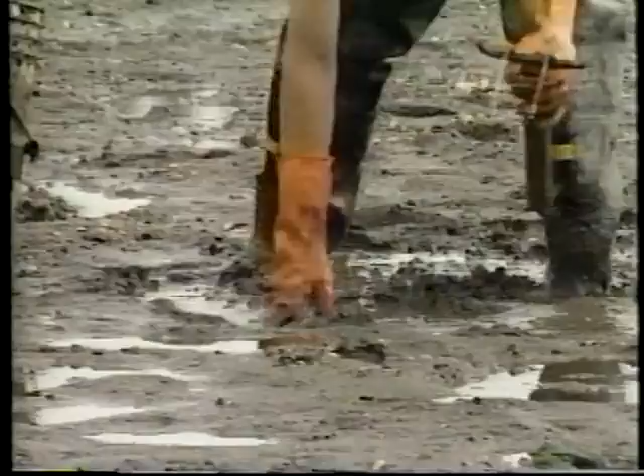As the child looks closely into the pool of water, water's true gift is revealed to him. Life. Water is life. Water feeds the shellfish and agricultural industries, which in turn feed us and feeds our economy with thousands of jobs. Clean water. The water we drink, the water that provides us with a quality of life that's enviable.

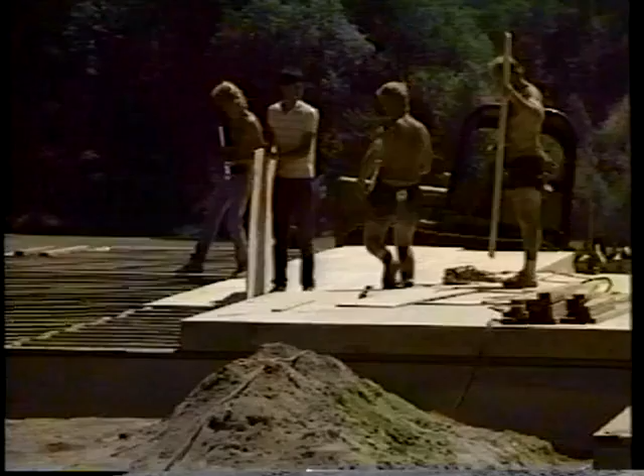But as the population increases, so does the threat to our life-giving waters. In recent years, untreated and inadequately treated sewage from failing septic systems has contributed to the contamination of our water resources. Our rivers, lakes, and groundwater serving our wells are being contaminated, and the health of our neighbors, friends, and families is being threatened.

Hi, my name is Randy Hoffmeyer. Water quality is a complex issue. As a homeowner, you play an important role in helping to keep our area's water clean and pure. In fact, you own a tool that's designed to help keep our area's water clean. An on-site sewage treatment and disposal system. Your septic system. A septic system treats wastewater to a level that can be safely disposed of. When properly maintained, an on-site sewage system provides not only effective treatment and disposal of household wastes, but it can last indefinitely.

In this program, we're going to take a look at what a sand filter system is and how it works. In the second half of the show, you'll learn about inspecting your system and how to maintain it so you can avoid costly problems. A properly maintained system is going to effectively treat your sewage and save you a lot of money and headaches. But before you learn how to maintain your system, you first have to understand why you have the type of system you do and how it works. With growing concerns about the degradation of groundwater and surface waters, alternative systems have become increasingly common because of the increased efficiency in treating and disposing of sewage.

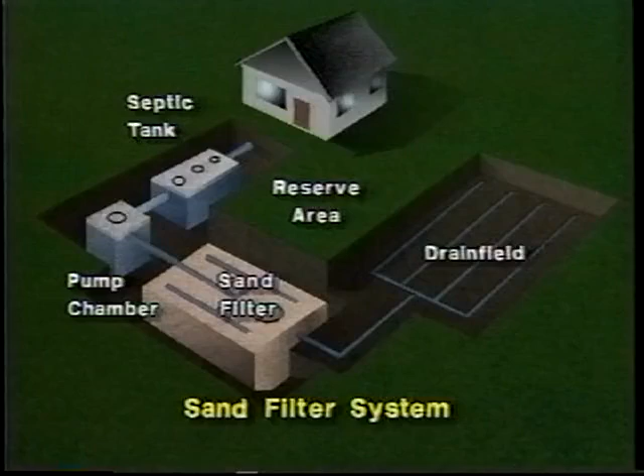The septic tank is a watertight tank, usually constructed out of concrete. In the state of Washington, a two-compartment septic tank is required for all new on-site sewage system installations. Here's how it works. Household wastewater flows from the house into the first compartment through an inlet tee. In this compartment, household wastes separate into three layers. Heavy solids settle to the bottom of the tank to form a sludge layer. The lighter solids, like fat, grease, and paper, float up to the top, forming the scum layer. This separation process yields a treatable liquid wastewater layer called effluent in the center of the compartment. The wastewater flows out of the first compartment through the outlet tee into the second compartment. Here, the separation process is repeated.

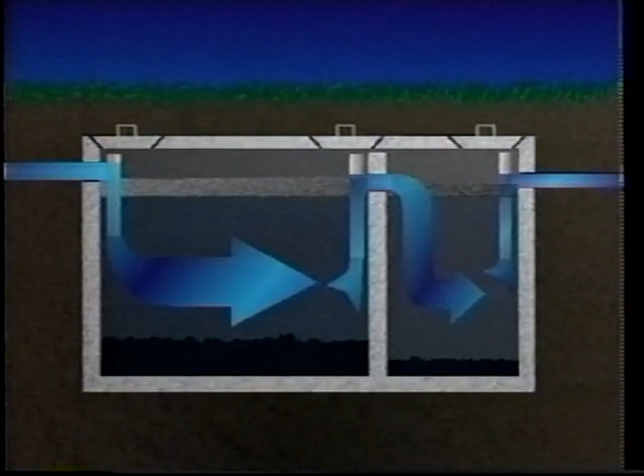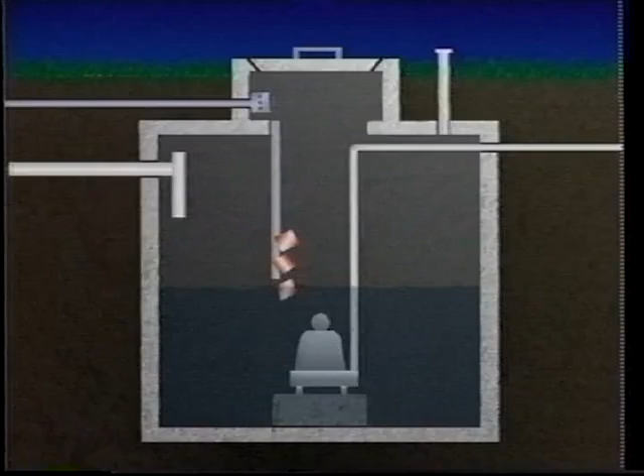From here, the partially treated wastewater flows out of the septic tank through a screening device and into the pump chamber. In the pump chamber is a pump, on and off floats, and a high water alarm float. When the effluent rises to the level of the on float, the pump begins gently forcing the wastewater under pressure to the sand filter. The pump lowers the level of effluent in the pump chamber until it reaches the level of the off float and stops. The effluent is distributed evenly over the surface of the sand filter through a network of small pipes, trickles through the gravel, and is treated as it filters through the sand. A gravel underdrain collects and moves the treated effluent, either by gravity flow or pressure distribution, to the drain field, or a mound system, where it is dispersed into the soil.

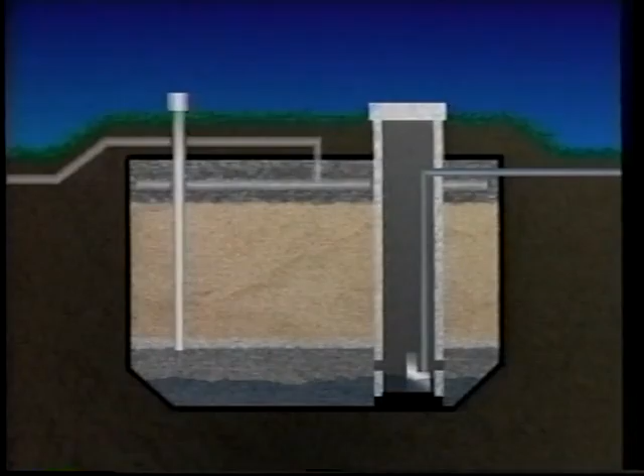To get a better understanding of where and why a sand filter system is installed, we're going to talk with Kevin Plemmel, a sanitarian who has reviewed many alternative systems. Now, Kevin, when you're evaluating a potential building site such as this, what are some of the things you're looking for? Well, Randy, when a designer or engineer evaluates a site, he takes into consideration such factors as setbacks to surface waters, setbacks to wells, topography limitations, and most importantly, soil conditions. Now, what are you looking for in the soil conditions? What we're trying to achieve here is a certain level of treatment before the sewage re-enters the groundwater. And if the soil type and soil depth are inadequate to provide this, an alternative system will be required. To get a better understanding of how a sand filter system works, we're going to talk with Mike Olson of Olson Backhoe, whose crew is in the process of installing a sand filter system right now.

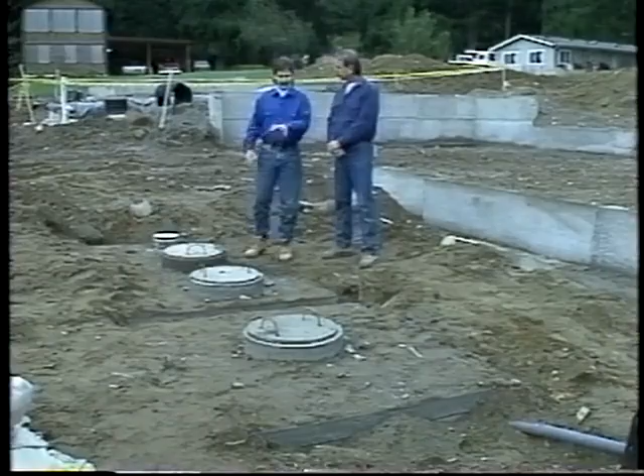And during the installation process, Mike worked closely with the engineer who designed the system to ensure that it would be built to exact specifications. Well, Mike, I see that your crew has already installed the septic tank and the pump chamber. Why don't you lead us through what happens to the wastewater once it leaves the house?

Sure, I'd be glad to, Randy. Basically, we have all the raw sewage after it leaves the house. It enters the tank at this location here, goes through a settling process, then there's a divider in the tank, then secondary settling takes place in this area of the tank. So there are two chambers here. That's correct. Then from here on into the pump chamber. And once it reaches a certain level there, then the pump will kick in and send it onto the sand filter. That's correct. Now, why don't we go take a look at the sand filter? Sure.

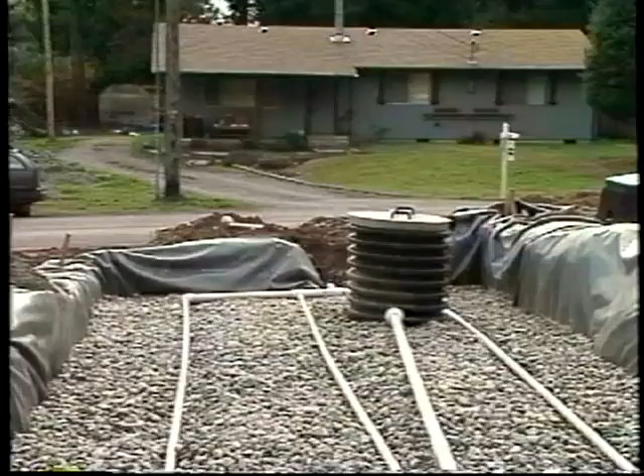Okay, Randy, what we have here is the sand filter itself. Now, this one is in a stage just prior to being covered up. As you can see, the pipe entering from the pump chamber here is then pumped out through these three laterals for even distribution throughout the length. The effluent then filters down through the drain rock and through the sand treatment medium beneath it, is then collected into this dry well and is pumped into either the mound or the drain field.

Now, every system is required to have a reserve drain field area in case the main drain field area should fail. And it's also important to treat that reserve drain field the same way you would the main drain field, right? That's a very good point, Randy. You want to make sure that you don't drive or build on the drain field or the reserve area. Where is the reserve area for this system? For this system, it's right below us in this area. Now let's take a closer look at a drain field.

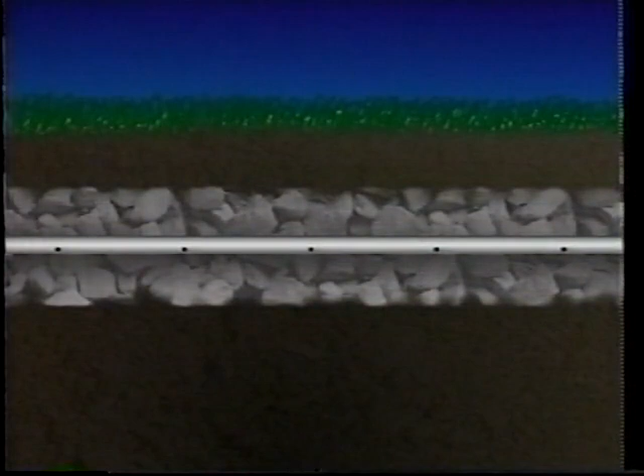The drain field is composed of a network of perforated pipes placed in gravel-filled trenches in the soil. Effluent is pumped through the pipes in controlled doses to ensure uniform distribution throughout the drain field. The effluent leaves the pipes under low pressure through small diameter holes and trickles downward through the gravel and is treated in the soil before it reaches the groundwater.

Now that you know how your septic system works, it's important to know how to keep it functioning properly. At the beginning of the show, I said that a home septic system was a highly effective, long-term wastewater treatment and disposal system. The key to long-term effectiveness is simple routine maintenance, regular inspections, pumping when needed, and prudent use of your system.

The owners of this house know they have a septic system and think it might need to be pumped. To find the design and location of their system so they can show the pumper, they check their as-built plans that they got from the local health department. Larry Kosher of Petunia Pumps is going to inspect the system to determine what condition it's in and to see if it's functioning properly. Well, Larry, I see that the homeowner has uncovered the manholes and the system's ready for inspection. Now, what are you going to be checking?

When I come into a system like this, I always check the inlet and outlet baffles first to make sure that they are clean. If not, we clean those up really well. Then I go to the main chamber and I check the scum and the sludge layers to make sure the tank needs to be pumped. Now, is this inspection something that a homeowner can do themselves? Yes, it is, but they need to contact their local health officials first. Okay. While Larry checks the system, we're going to take a closer look to see what he'll be inspecting.

Inside the septic tank, the sludge settles out at the bottom, the scum layer floats to the top, and in the middle is the effluent that will be pumped into your drain field for further treatment. If the distance between the top of the sludge layer and the bottom of the tee is 12 inches or less, your tank will need to be pumped. If the sludge level were to reach the bottom of the outflow tee, your system would begin pumping sludge into the drain field, clogging the pipes and the soil. If this were to happen, you would need to replace your drain field, which is a very costly process.

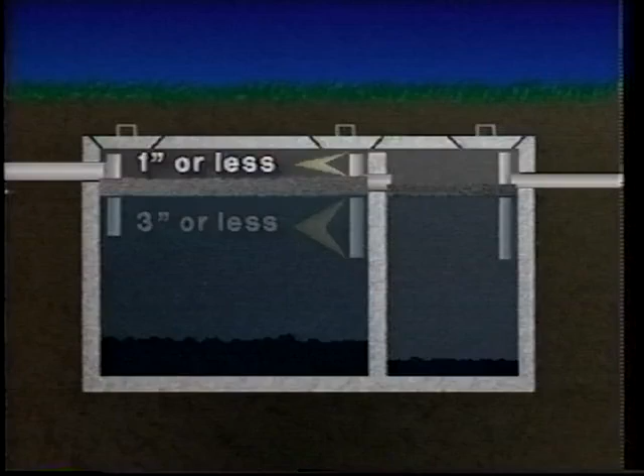Your tank will also need to be pumped if the distance between the bottom of the scum layer and the outflow tee is less than 3 inches and/or if the top of the scum layer is within 1 inch from the top of the outlet tee. Well, Larry, what did you find? Does the tank need to be pumped? Yes, it does. The scum layer is really heavy, and I'm afraid if they would have waited any longer, they might have had some severe problems. What's the rule of thumb on how often a tank should be pumped?

Usually we recommend every 3 to 5 years, depending on how many people are on the system and how they use their system. The important thing to remember is to have your system inspected on a regular basis to make sure that it's functioning properly.

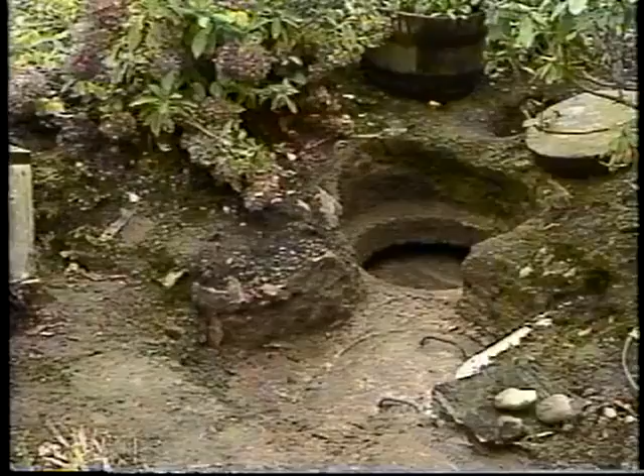Besides checking the tank, there's some regular maintenance that needs to be done to the pump and the pump chamber. Even in a system that is in perfect working order, some large particles may pass from the septic tank into the pump chamber. All systems using a pump for pressure distribution are required to use either a screened outlet baffle or a screen around the pump to prevent large particles from entering the drain field.

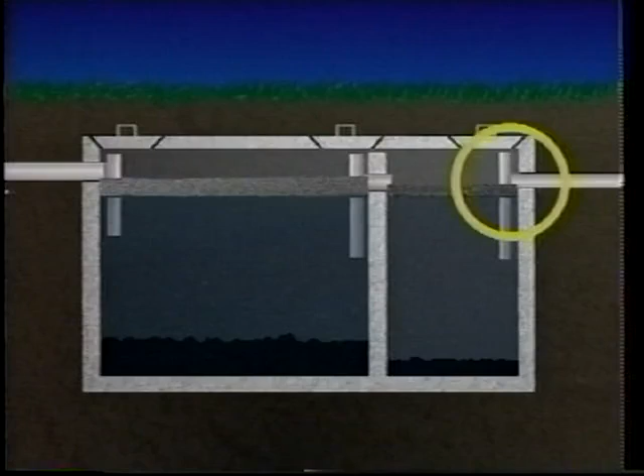The screen is also used as an early warning system. If the screen plugs, it is a good indication that your septic tank has exceeded its capacity and should be checked immediately before any damage is done to your drain field. You will also need to have any solid material that may have accumulated in the pump chamber pumped out.

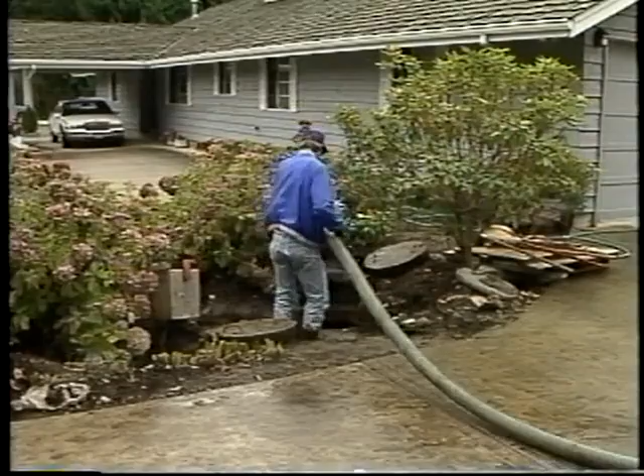Your pump chamber also has a high water alarm that will go off when your pump chamber becomes too full. These alarms can be located in a variety of locations, so if you don't know where yours is, check your operations manual. Inspecting your septic tank once a year, pumping when needed, and inspecting your pump chamber are important steps in ensuring a long life for your septic system. There are other steps, however, that are just as important, namely, protecting your system from damage and using it wisely.

Once you know where your septic tank, pump chamber, drain field, and reserve drain field area are located, it's important to protect them. Never drive heavy equipment like cars or trucks over your drain field. The weight can break the pipes and compact the soil, causing your system to fail.

When landscaping, make sure that what you plant is compatible with your drain field. Roots can damage pipes. Construction over your drain field, or even laying concrete or plastic, can cut off the supply of oxygen to the soil. This lack of oxygen greatly reduces the ability of the soil to properly treat wastewater. Grass is the best cover for your drain field.

Depending on your system, you may have one or more 4-inch capped PVC pipes like this one sticking up in your yard. This is a monitoring port. It's important that you do not remove it or allow it to be filled in. If you'd like more information on how to check your monitoring port, contact your local health department.

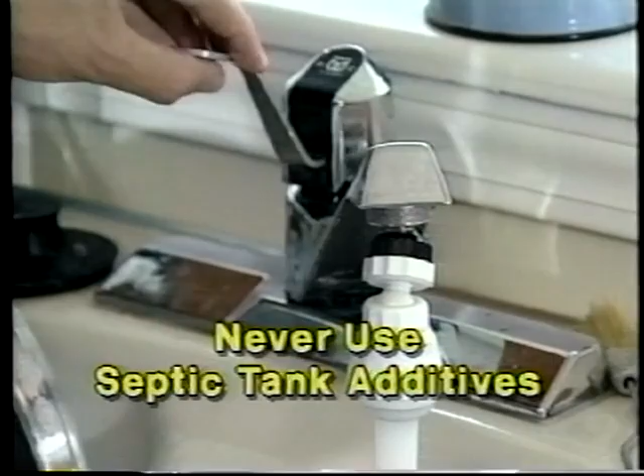Never use septic tank additives. Not only do these products not work, but some have been shown to be harmful, cause expensive damage to your system, and contaminate the groundwater. These products are definitely not recommended. The natural processes of your septic system are perfect for effective wastewater treatment.

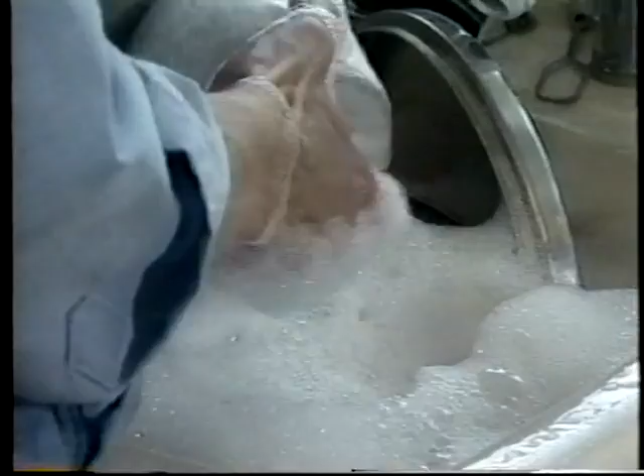Be careful what you put into your system. Definitely avoid putting grease in the septic tank. It builds up quickly. A garbage disposal greatly increases the amount of suspended solid material in your septic tank that can clog your drain field. If you have a garbage disposal, use it as little as possible. Do not put materials that won't easily break down in your system, such as paper towels, diapers, cigarettes, or plastics.

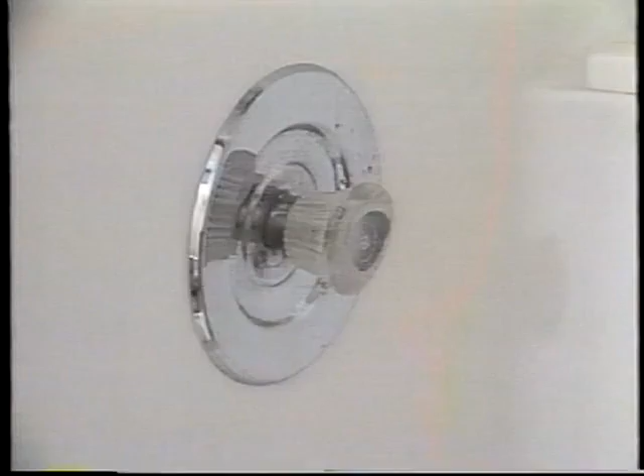Practice water conservation. The more water you pump through your system, the more stress you put on it. This means simply using common sense. If you have a hot tub, don't drain it into your system. Let the water run into the ground. Wash only full loads of clothes, and distribute your washing throughout the week so you don't overload the system. Take quick showers instead of baths. Fix leaky fixtures, and consider installing low-flow fixtures for toilets and shower heads. These simple practices will greatly extend the life of your system and allow it to operate at its best.

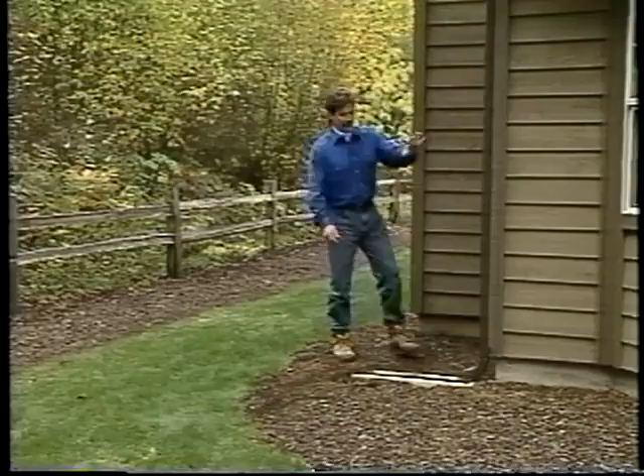Finally, divert water runoff and roof drainage away from your septic tank and drain field. The addition of extra water to your drain field area can lead to saturation. When the soil becomes saturated, it can no longer effectively treat wastewater.

In this video, we've looked at how septic systems work, why you have the type of system you do, and how to take care of that system. It's easy to understand how septic systems are ignored, out of sight, out of mind. But the importance of a well-maintained septic system is obvious. By following the preventative maintenance steps outlined in this program, you'll not only be saving yourself a lot of costly repairs, but you'll be doing your part to help preserve our clean water resources.

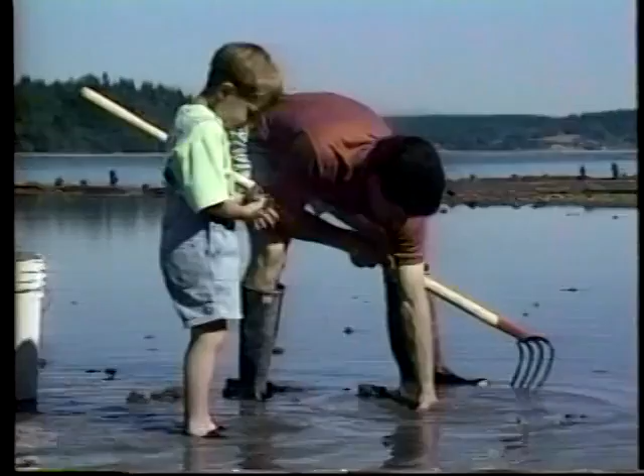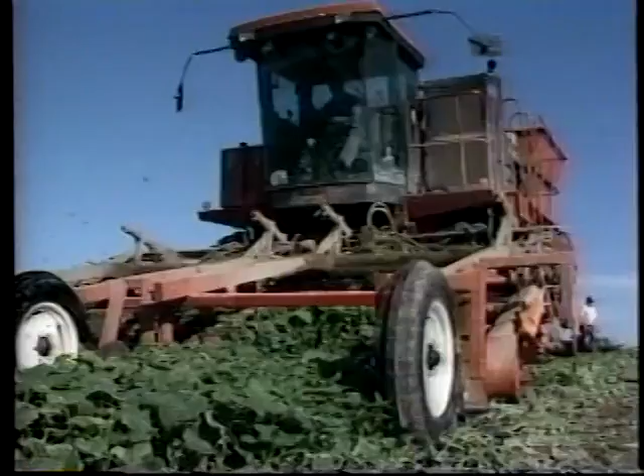Clean water means that recreational and commercial fishing and shellfish will remain safe and abundant. Clean water means we can drink our well water free of contamination. Clean water means our agricultural industries can provide our families with healthy foods to eat. Clean water means future generations will be able to enjoy the precious waters of life that are all around us.

For more information about on-site sewage systems and proper system maintenance, contact your local health department.